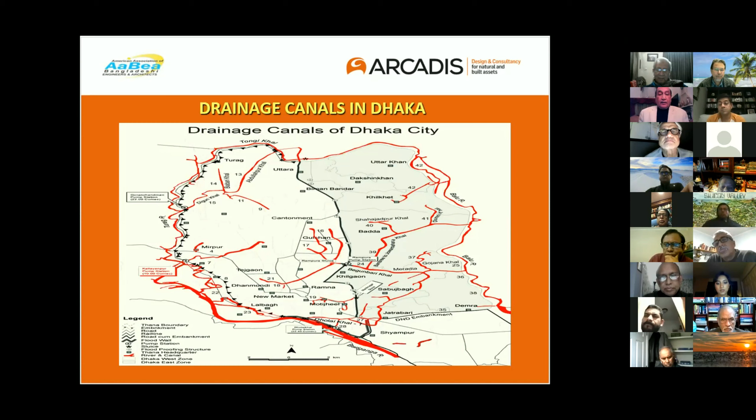But the problem created is that in order to protect Dhaka city against flooding from the surrounding rivers, flood embankments were built, practically enclosing the entire Dhaka city. Now, the surface water, which used to go directly into the river, cannot go because of this embankment. That has created a problem as far as waterlogging is concerned. What we normally call it is a bathtub syndrome — like a bathtub, if you fill it with water, unless you have an exit or drain, that water is going to stay there. That has become the problem for Dhaka also, because of this flood control embankment.

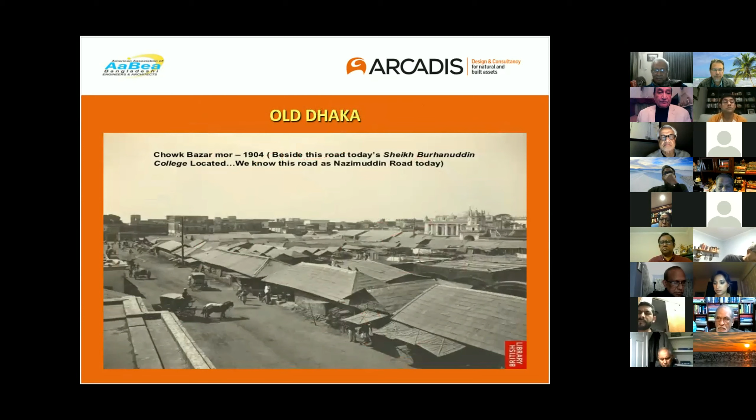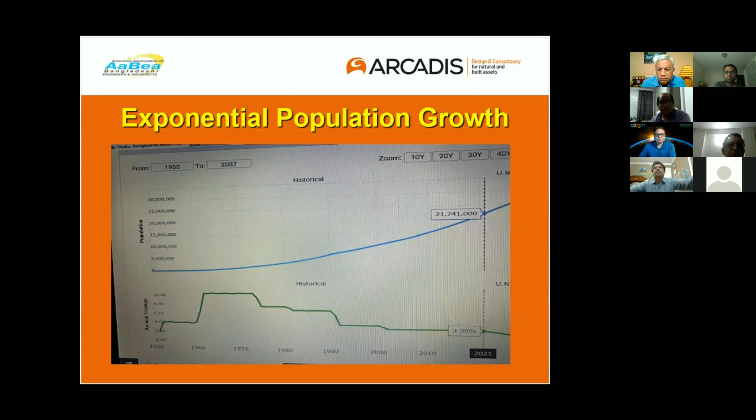But the biggest problem is, of course, since the independence of Bangladesh, there was an exponential population growth. Currently, it is projected to be 21 million, as shown in this graph. And in a small area like Dhaka city, 21 million people is difficult to accommodate. The infrastructure in terms of roads, bridges, and sewer lines, sewer treatment did not keep up with the growth of the population.

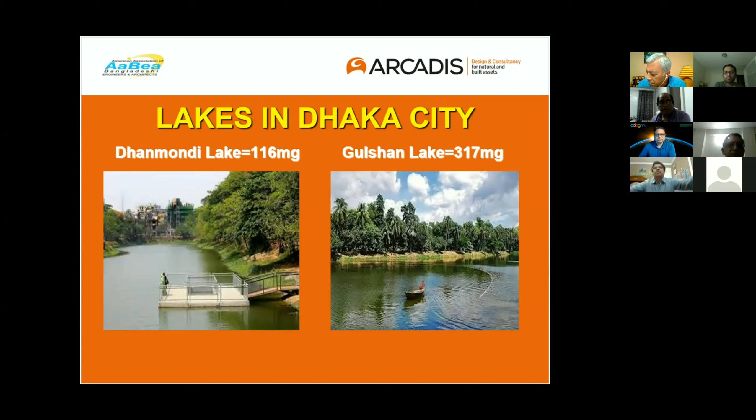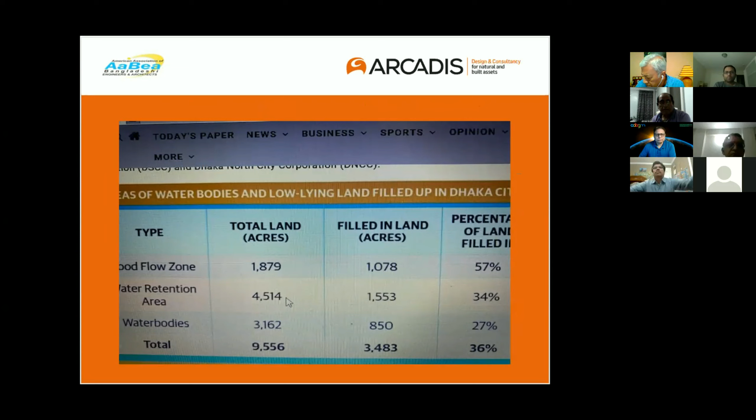As you can see, today's Dhaka is a concrete jungle, very little open areas. The paved surface area has increased substantially, and that reduced the infiltration and increased the surface runoff. We have about 4 large storages for the surface, like Dhanmondi Lake has a capacity of 116 million gallons, Gulshan 317 million gallons, and then Crescent Lake 10 million, Ramna Lake 24 million gallons. But unfortunately, 1/3 of the capacity has been lost due to siltation. So additional water is difficult to transmit into those lakes.

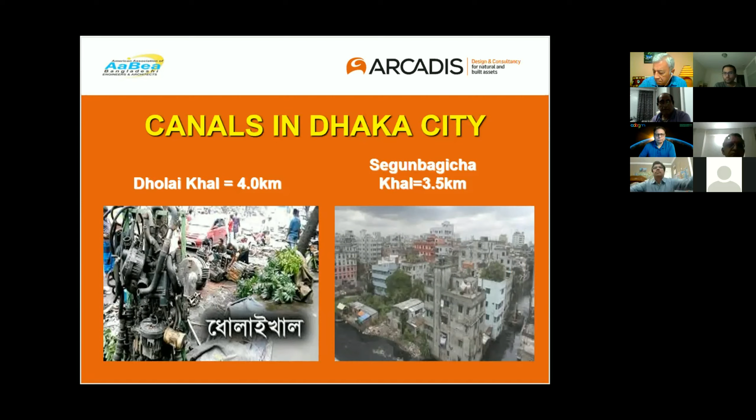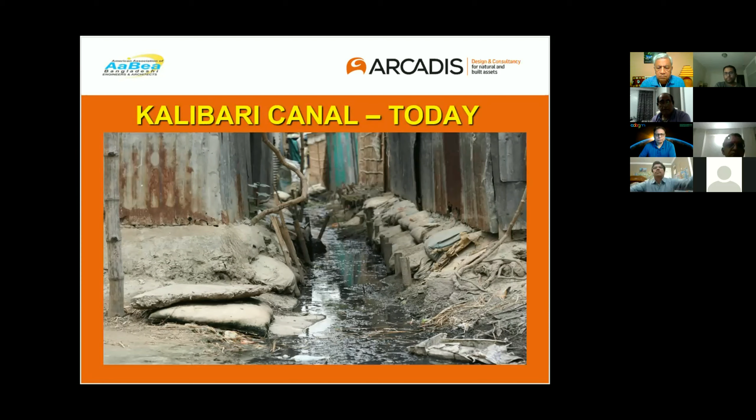This is another canal, Kalibari Canal. In here, it is more like grabbing the canal, and they build up those sheds or things like that to provide accommodation for the ever exploding population. These are all contributing factors towards the waterlogging. The result, as you can see, there are many. I just shared 2 of those, how the waterlogging problem has become serious.

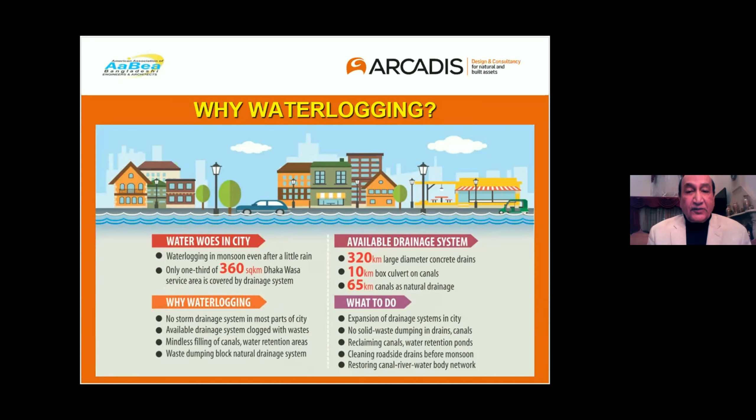WASA has summarized nicely the causes and what should be done and can be done, as presented in this slide. WASA is Water and Sewer Authority. They were responsible for water and sewer as well as this waterlogging. Out of 360 square kilometers of Dhaka city, only 1/3 has any sewer. Total concrete drains is only 320 kilometers. There are 10 kilometers of box culverts and 65 kilometers of canals today. From 300 it has now ended at 26, and most of them are not operational.

So, summarizing, what is the cause of the waterlogging? No storm drain system in most parts of the city. Available drainage system is clogged, mindless filling of canals. And according to WASA, how can we address this problem? The first thing they said is expansion of the drainage system in the city, meaning you have to build up all those storm drains wherever we don't have them, which is 2/3 of the city. Then reclaim the canals, which is important. I think the 2 new mayors have started that. Cleaning, of course, the roadside drains, etc.

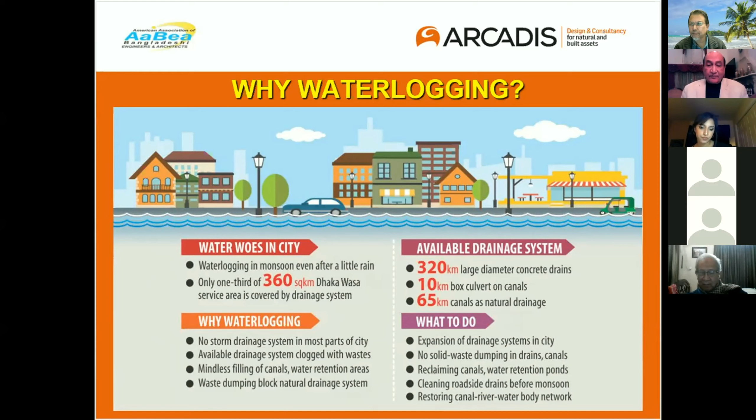Now, I'll just give you an idea of what it involves to install all those storm drains along the roads. It's not only in Dhaka city; we have an area in Queens known as Southeast Queens, and that also gets flooded every time there is a rain. I was leading the master plan for that area. It is a much smaller area, only 15,000 acres, as you can see. So we designed what we call the drainage plans; surprisingly, 60% of the streets don't have any sewer lines. So same problem as in Dhaka. Dhaka doesn't have all those storm drains also. So we developed a master plan for a small area, 15,000 acres.

And when the price tag was added, it was approximately 14 billion, with a B, dollars just to develop this area. And it will take 30, 40 years. They're slowly doing it, following the master plan. This is what we call the gray infrastructure, very expensive and time consuming. To install this type of thing in 2/3 of Dhaka city is going to cost us a fortune.

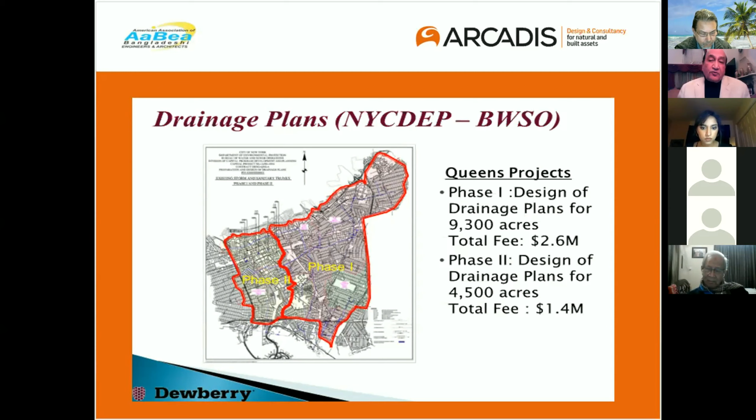So as an alternative, what we are doing in New York City, we have come up with a very innovative solution, which is known as green infrastructure. So what is a green infrastructure? Actually, what green infrastructure does is mimic the natural condition, like back in the 19th century, when water could infiltrate into the ground. So we're trying to facilitate that process. The process is to increase the infiltration and water storage, and that's the way we can do that.

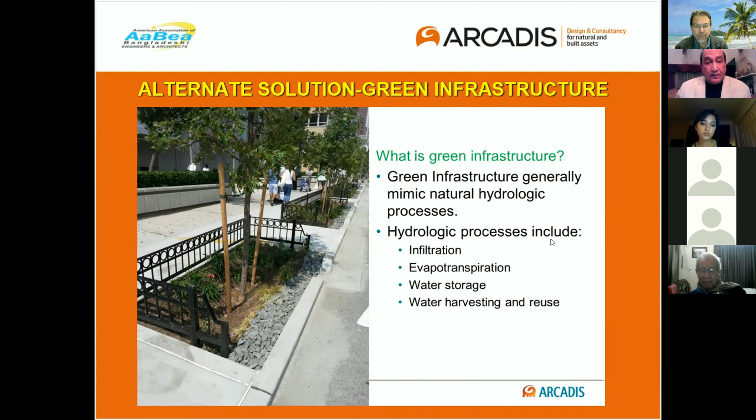Again, the same thing. The bottom layer is going to be, in New York City we have used stones, but in Dhaka most likely we'll be using broken bricks, preferably Jhama brick, which can absorb more water. The top layer is going to be topsoil, then we can plant, again, shrubs, trees, flowers, like that. Water is entering here, it fills up. When it exceeds the capacity, some infiltrates into the ground, and excess water will overflow into the back. It will reduce the peak of the runoff as well as reduce the volume.

Another thing that has been done is the blue roof, meaning we can store water on the roof. That is extensively done in Bermuda. They collect all the water for drinking. And the green roof: some of the buildings in Dhaka city are planting plants and things like that. That will absorb a lot of water. This is one of the ideas also.

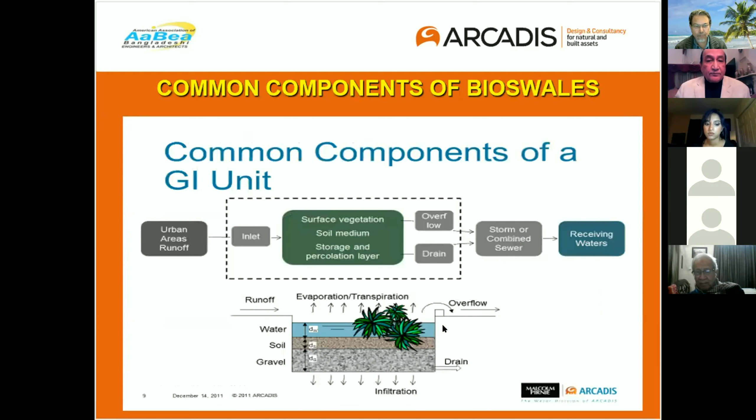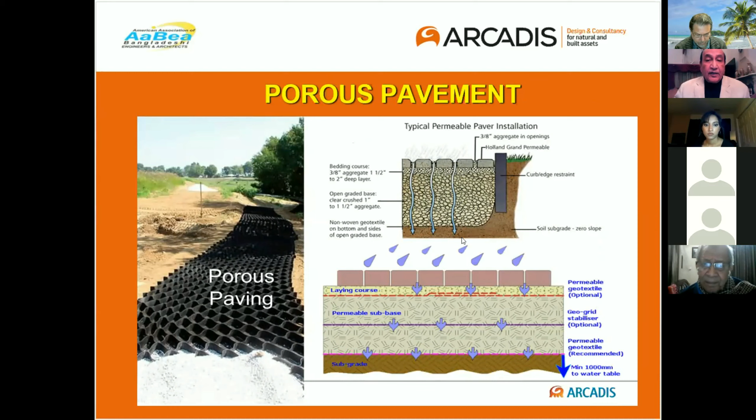Now we can use porous paving, as you can see. Instead of concrete slab, we can have all those planters and this and that, then the water can infiltrate into the ground also. We can also use rain barrels. In New York City, the responsibility is with the New York City Department of Environmental Protection. They were giving out all these kinds of barrels. If the downspout from the roof is connected there, then you can use that water for gardening also.

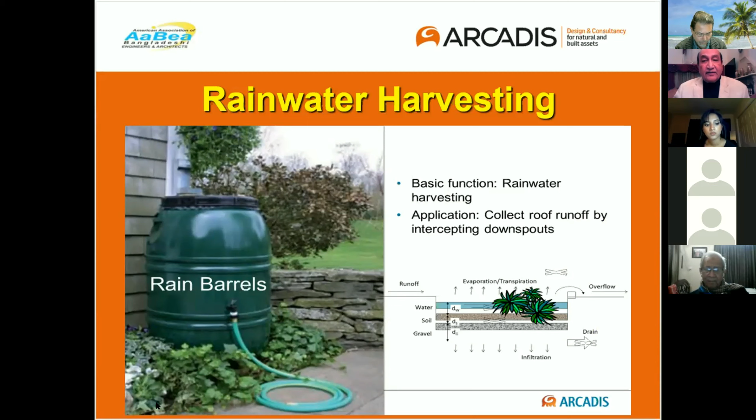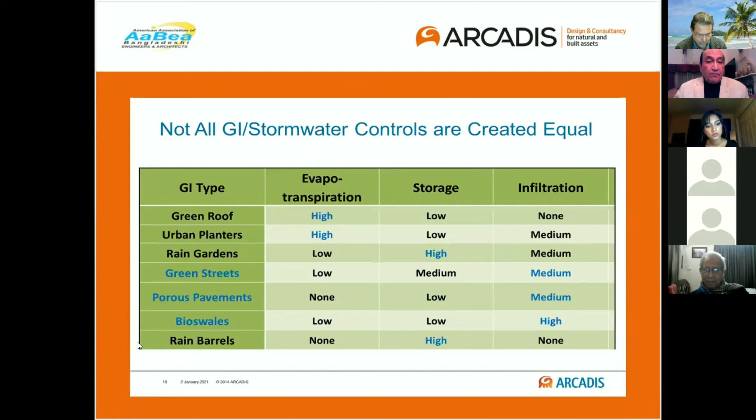But in today's presentation, we are going to concentrate on only one of the green infrastructures, which is the bioswales. And I will share with you what we have done in New York City, a case study of that. The goal was to capture the first 1 inch, or 25 millimeters, of rainfall. Impervious area in New York City is about 30% of the gross area. Dhaka city may be a little less.

Now, this is the idea of the bioswales. All the surface water from the roadways enters the bioswale and is stored or infiltrated into the ground, and the excess comes out from the outlet. That way we can reduce the peak as well as reduce the volume. That was the goal.

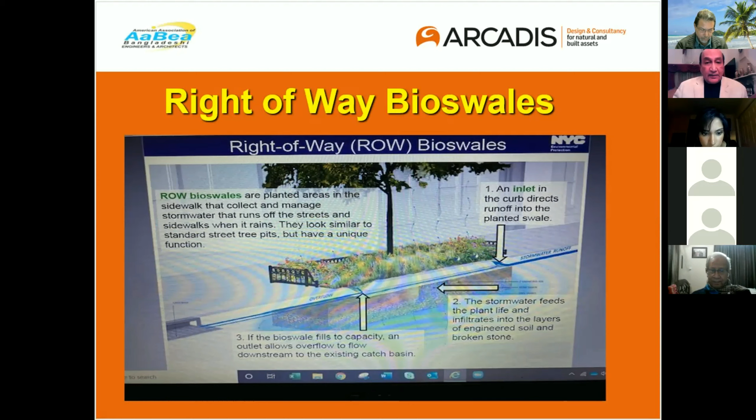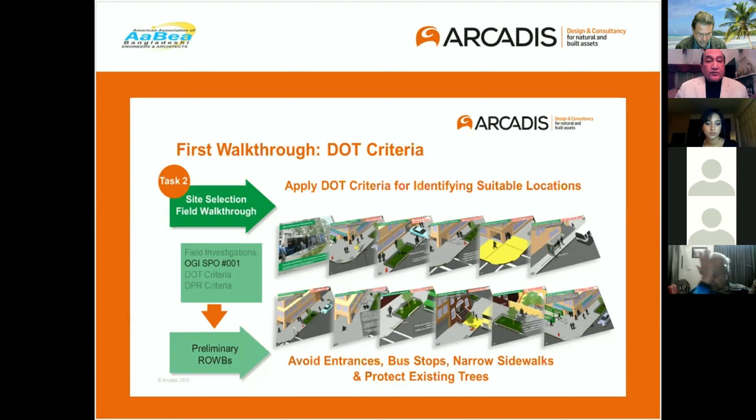Now, in order to install those bioswales, we have to have a site visit and site selection. We have to avoid all the entrances like driveways and things like that. We have to avoid bus stops and narrow sidewalks, and protect the existing large trees. We walk down and try to identify all those things and eliminate them. Only then can we select the location of the bioswales. As you can see, we are marking up where we can put that bioswale.

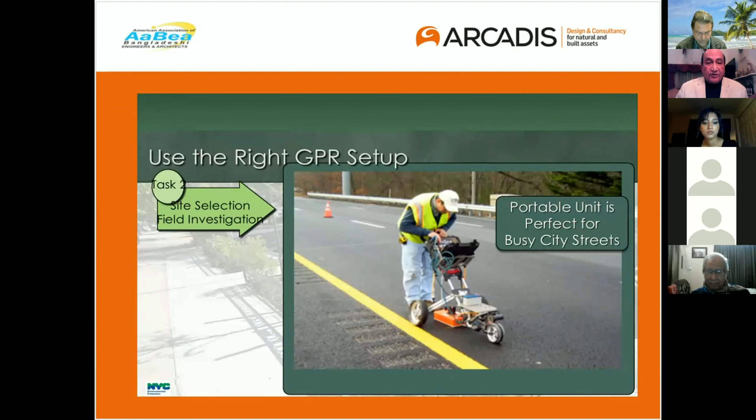So once we have identified a number of these, we want to know what utilities are underneath. So we conduct a ground penetrating radar survey and see what is underneath that slab. We don't want to interfere with very expensive items like fiber optics, things like that. We try to avoid that. This is one of the pictures from the ground penetrating radar survey.

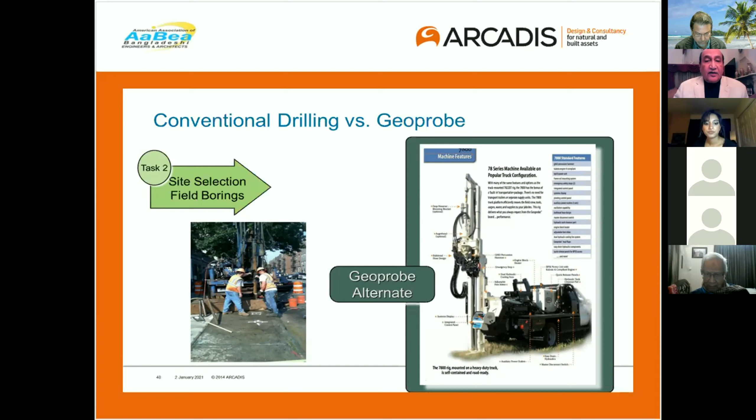Now, the success of a bioswale primarily depends on infiltration, location of the groundwater table, size of the sidewalk, as well as some roadway median. We have been determining the permeability of the underlying soil through boring and the falling head permeability test. In New York it took at least 1 day for one boring. That's very time consuming. A new idea I have proposed for the New York City DEP is called GeoProbe. We can do 4 boreholes with this instrument much faster, and the cost is 1/4 to 1/3.

Also determining the permeability: this hydraulic profiling tool, HPT, can determine the permeability of the soil for the entire depth, as opposed to the falling head test. So this is another innovation in the design.

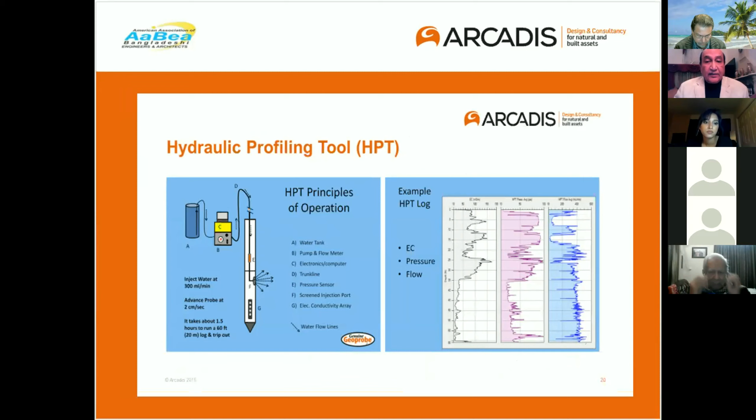Now let's talk a little bit about permeability. In New York City, they were very conservative. They said, we will not put a bioswale if the percolation rate or infiltration rate is less than 0.125 inch per hour, or 8.8 × 10^-5 centimeter per second permeability.

If we compare with the great soil engineers like Karl Terzaghi, who is considered the father of soil mechanics, he gives a much higher range. Ralph Peck, his disciple, also gives a range. Gregory Tschebotarioff, another great practical geotechnical engineer, gives a range. Based on that, I recommended that there should be a range that we can use for the permeability cutoff criteria.

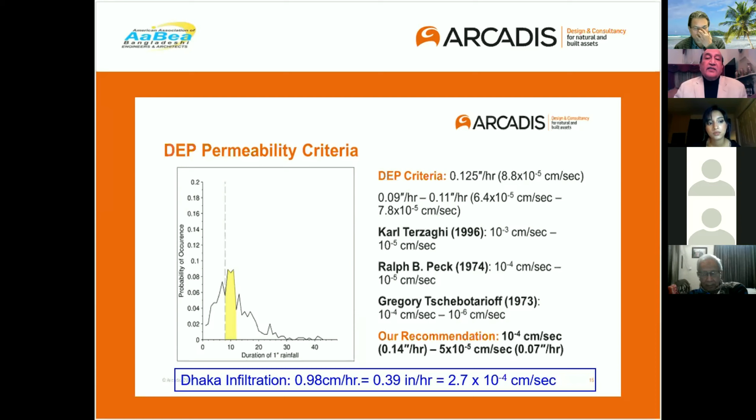I also looked into the infiltration rate of Dhaka city, from a study by BUET for recharging the groundwater. The average infiltration was 0.98 centimeter per hour, or 2.7 × 10^-4 centimeter per second permeability, which is much better than New York City. So that criteria is completely fulfilled.

The other consideration is the groundwater. If it is very high groundwater, of course, those bioswales may not be very effective. But as you know, WASA is supplying the water by groundwater, and the groundwater has depleted in Dhaka city in the magnitude of 40 meters. This is the diagram shown of today's groundwater. So our bioswale will be within 3 meters, so that will not be affected, which is good news.

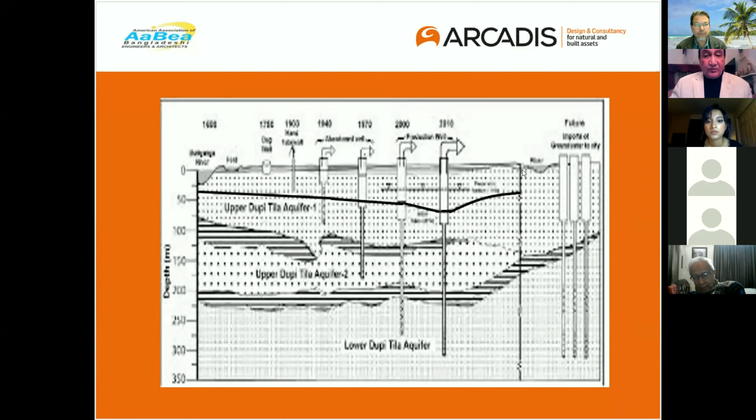Now, the other consideration is that in Dhaka city, we have problems in the sense that we may not have standard sidewalks. In New York City, the minimum width of the sidewalk is 8 feet. We can use 4 feet for the bioswale and 4 feet for the pedestrian. In Dhaka city, the widths of the sidewalks are not regular, and many streets don't even have any sidewalk.

So what are we going to do in Dhaka city where there are no sidewalks? There is another design I was involved in, for the St. George Terminal in Staten Island. They had a similar problem. We came up with an innovative solution, which is called an infiltration basin using rain tanks.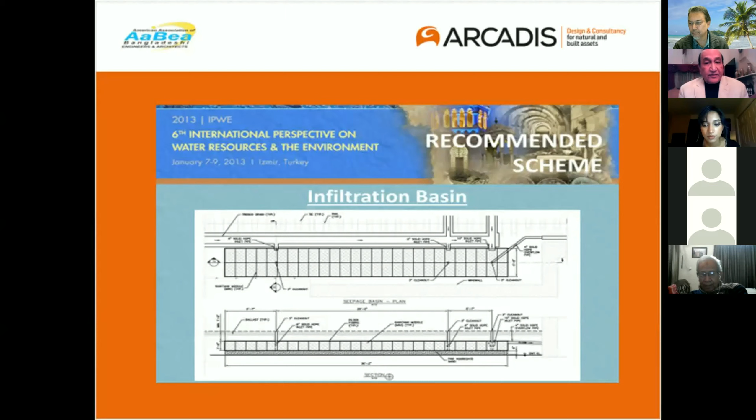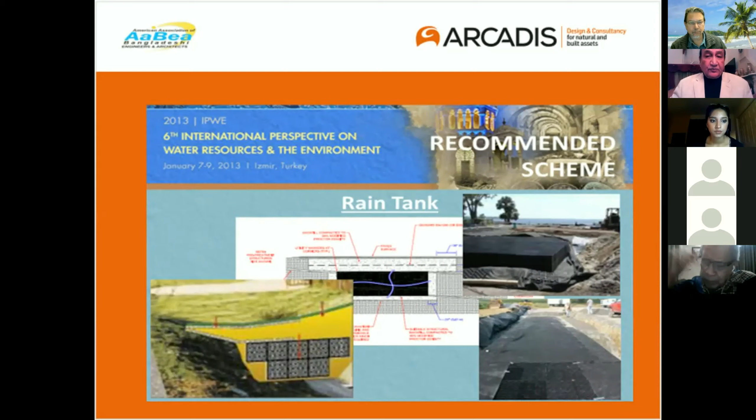So rain tanks are really a modular type of thing, very high porosity, 95% porosity, which is good. They can be installed in a basin, and we can divert the water into there, and that will infiltrate into the ground. This innovative project, as I said, was done for Staten Island, and I presented this paper at the 6th International Perspective on Water Resources and the Environment, held in January 2013 in Izmir, Turkey. So this is another solution we can look into for Dhaka as well.

Now, in order to bring the water, we might have to use a French drain. It's a very fancy name, but it's very simple. We dig a deep channel, we put in perforated pipes, and fill it up with gravel. This will collect all the water, which will then be transmitted to the infiltration basin.

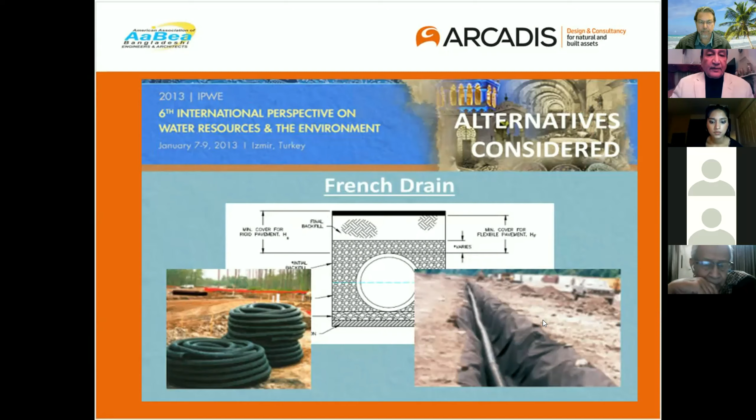Now, the other thing we can do in Dhaka city, particularly in the new roadway areas, they have pretty decent medians. And those medians can be used as a large infiltration basin to collect the surface runoff. As you can see here, this is the median, and we can put the infiltration basin for the entire length or width. That could be a very large storage for the surface water. It has two benefits: it will reduce the surface runoff, plus provide the moisture needed for these plants. We just started to do this kind of thing in phase 2 for New York City.

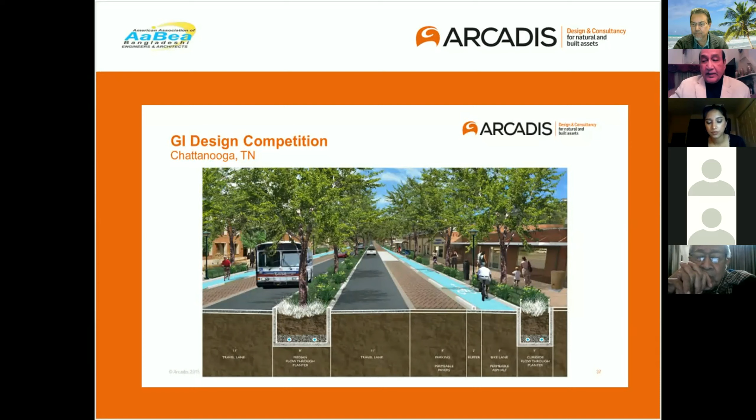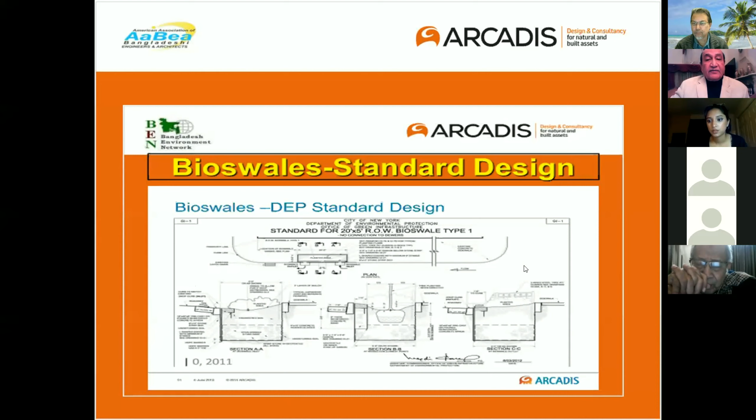This is the standard design we have developed. We have developed standard designs for 3 types: 10 feet length, 15 feet length, and 20 feet length. This is type 1, 20 feet length. As you can see, the water enters here. Then in the middle, we can put topsoil and the planting. Then at the outlet, the excess water can get out back. These standard designs and drawings are all available.

This is the simple construction. You dig a hole, then the bottom 2.5 feet will be filled up with gravel, in our case probably broken bricks. And sometimes the permeability could be very low. Then we put in sand drains, just a perforated pipe we fill up with sand or broken stone, to facilitate the infiltration.

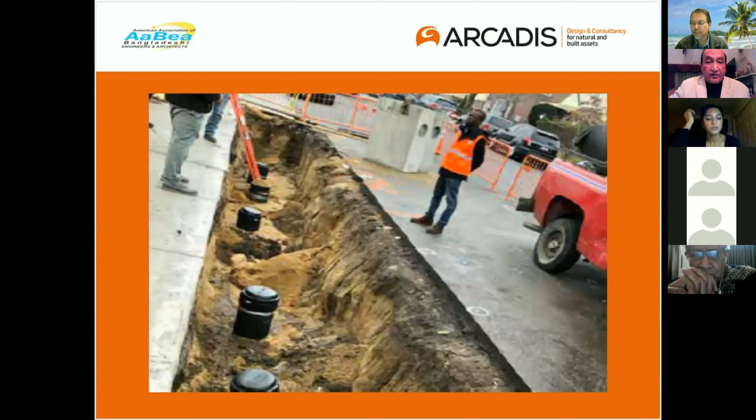Now let me try, if it works, to give you the idea of how it works. Very simple concept. The water from the street is entering through the curb cut into the bioswales, and it is being stored and infiltrates into the ground. And when it exceeds the capacity of the individual biocell, it is returned back to the street again. Very simple concept. We have done model studies and everything, and it works very well.

Now let me give some conceptual ideas. I looked into a major rainstorm in Dhaka city back in 1996. It was raining continuously for 3 days. On the first day, September 16, the intensity of rainfall was 37 millimeters per hour. The second day, the 17th, it was 28 millimeters per hour. And on the third day, September 19th, it was 41.5 millimeters per hour.

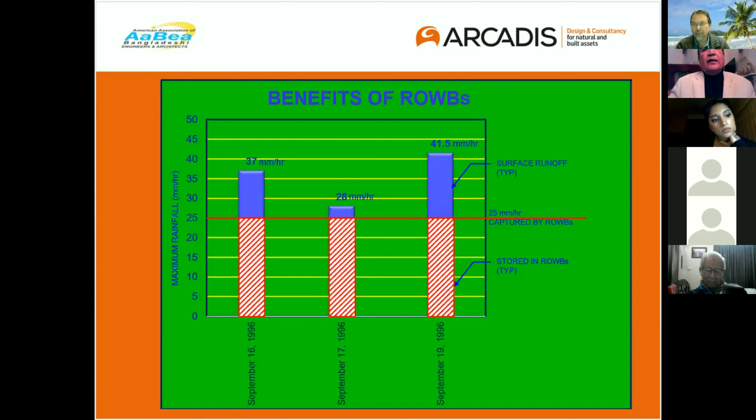If we can install those bioswales, then the peak will be reduced substantially, will be spread out, and the volume also will be reduced substantially. So the waterlogging will be mitigated quite well.

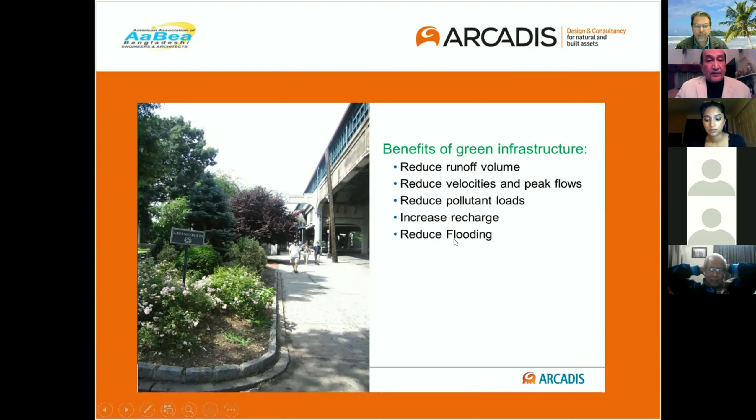Now, just to summarize, what are the benefits of these bioswales? Number one, reduce the runoff volume. Number two, it will reduce the velocity and the peak flows. Increase the recharge into the groundwater, which we badly need in Dhaka city. And of course, reduce the flooding or waterlogging. These are the benefits of these bioswales.

Now, this is not the first time we are doing this, and Bangladesh is not going to be a guinea pig. It has been introduced quite some time. And we have been working on this innovative design for almost 8 years. The first paper I presented in 2014 in Quito, Ecuador. And that was primarily what we did in New York City.

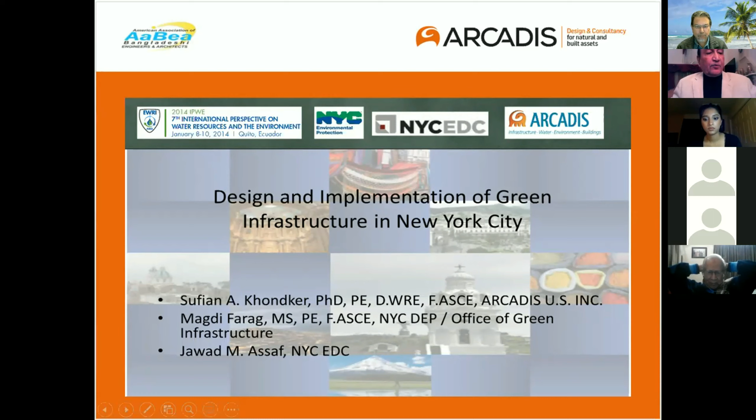And my co-author was Farag. Those who work in New York City DEP, they know him. He is kind of a godfather for the infrastructure. And we worked together to develop all those criteria and everything. The next one was presented at New Orleans. They were also looking into this.

Then specifically for Dhaka city, Alleviate the Waterlogging for Dhaka City, I presented this paper at the 10th International Perspective of Water Resources and the Environment in 2018 in Cartagena, Colombia.

The next one was in Dhaka itself in February of 2019. This was the first conference for the expatriate engineers. That was a great presentation on February 26th and 27th. And as I understand, our Dhaka North City Corporation Mayor, Honorable Atikul Islam, was supposed to chair this conference, but because of the mayoral election, he couldn't make it.

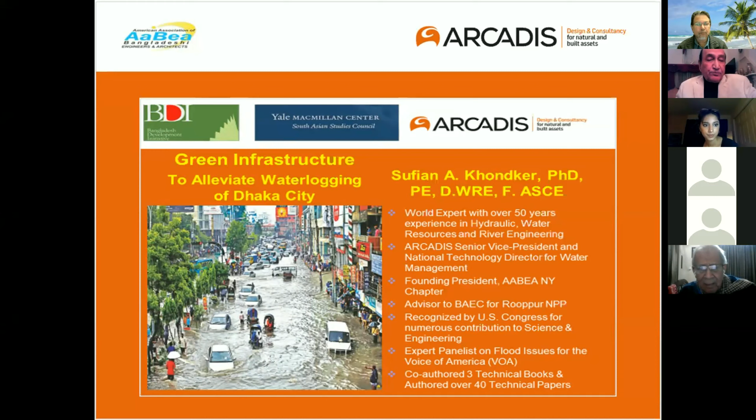The last one I presented for BDI, which is Bangladesh Development Initiative. They had this conference at Yale University back in March 2019. So this is not new. It is pretty much a proven concept.

Now, we got pretty good coverage, like Prothom Alo had a front page featured article. Then Bangladesh Pratidin had a back page article on the Yale presentation. But again, I don't think it was presented to the key people, the decision makers. Nobody reads the newspapers and calls and wants to know about it. So that's one of the areas we have to concentrate on.

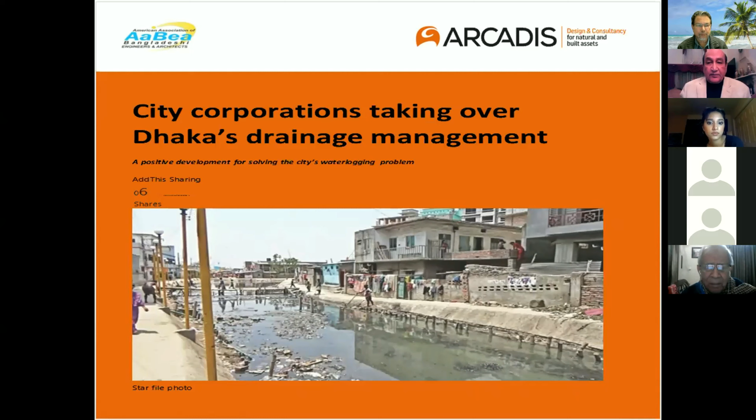As you know, since last month, the responsibility of Dhaka's drainage management was transferred to the city corporations. It is no longer with WASA and the Water Development Board. They took the full responsibility. And Dhaka Water Supply and Sewerage Authority has handed over responsibility of the Dhaka drainage system, consisting of 26 canals, 10 kilometers of box culverts, and 385 kilometers of storm drains.

Dhaka South City Corporation Mayor Barrister Sheikh Fazle Noor Taposh and Dhaka North City Corporation Mayor Atikul Islam expressed their commitments to deal with the canals first. Just to quote Barrister Taposh, we have already taken a crash program to clean canals and box culverts, which is necessary, of course.

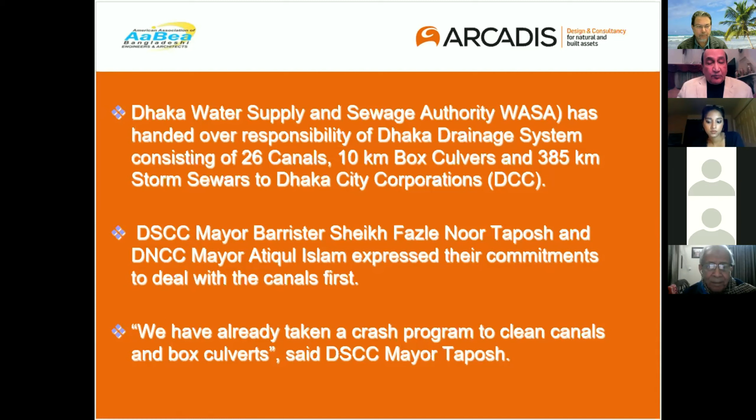Now, once we clean up all the canals and everything, then the water will be collected into those canals. And before, it used to transmit directly into the surrounding rivers. Now we have a problem. We built those embankments enclosing Dhaka city. Now these canals cannot directly discharge into the surrounding rivers. And that has created the problem I already explained earlier.

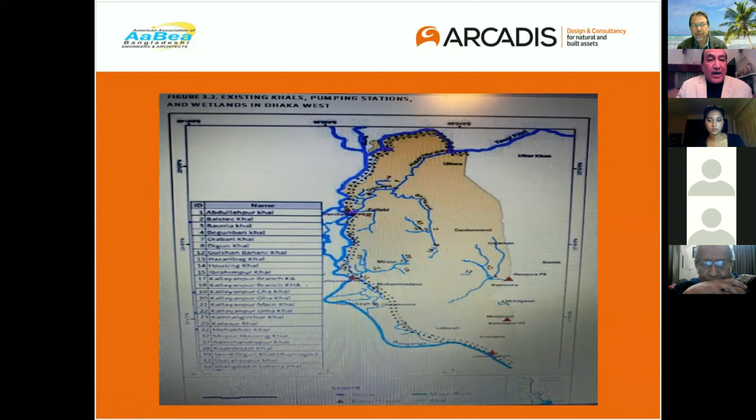Right now, what they're doing is that there are 4 large pumping stations pumping the water on top of the embankment. These are the 4 large pumping stations: Narinda 150,000 GPM, Kallyanpur 158,000, Confluence of Buriganga and Dholaikhal 349,000, and Goran Chatbari 349,000 GPM.

This sounds like a very large number, but this is absolutely inadequate considering the total surface runoff. And this solution is extremely expensive also. This is the idea. If the river water is low, then of course you can discharge the water from the canal directly into the river. But when the river level is high, of course, you have to close the sluice gate and you have to pump the water into the river. And that has been proven to be grossly inadequate.

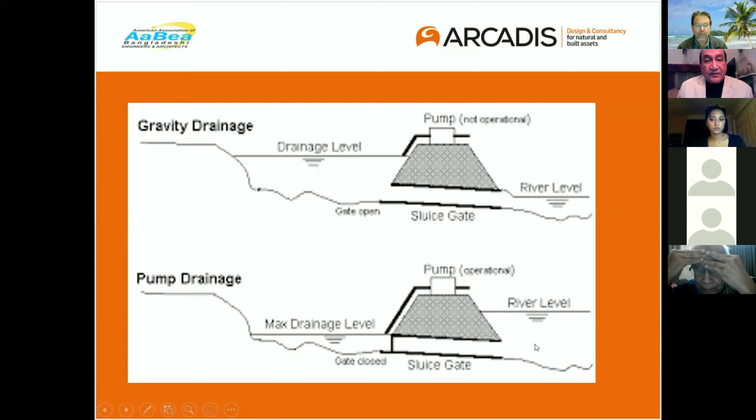Now, we looked into this problem. I was involved in two such designs. We all know historically the operation of the sluice gate, the track record is not that great in Bangladesh. So this is one of the concepts where the gate is operated by water. This is hydraulically operated, no manual operation, no push button closing and opening. This simply works with the water.

When the water level in the river is low, then the canal water will push up the gate and the water will be released into the river. When the water is high, the water will automatically close it. No other operation, and it works perfectly. I have used this concept in Hingham Bay in Massachusetts and Huntington Bay in New York. This could be a good solution to look into.

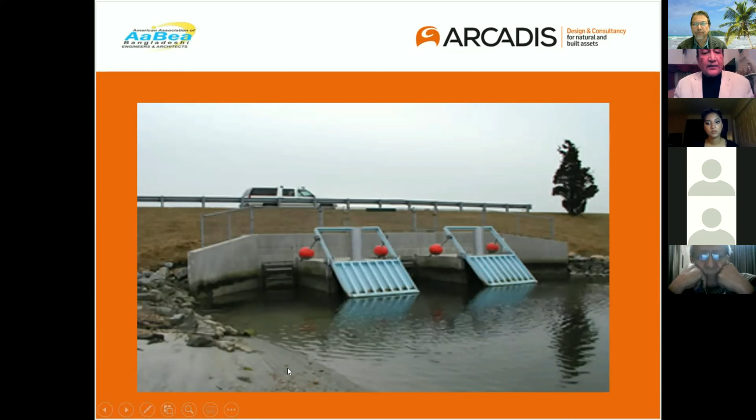Again, getting back to the current situation, Barrister Taposh promises that there will be a master plan to solve the waterlogging, which is the right way to proceed. Then, of course, we have a mayor from the Dhaka North City Corporation. Everybody is worried about the encroachment of those canals. And let me quote him, "No encroachers will be spared." That is going to be tough, but that is what is needed to reclaim those canals.

So what can I do? As an expert here and a Bangladeshi, I would like to help as much as I can. So this is my commitment to the authorities. Currently, it is going to be the Dhaka City Corporations; I'd be glad to serve as an advisor to the Dhaka City Corporations. As you probably know, I served as the advisor to the Joint Rivers Commission for 5 years until the Ganges Water Treaty was signed. Currently, I'm serving as the advisor for the Atomic Energy Commission, Bangladesh, providing advice.

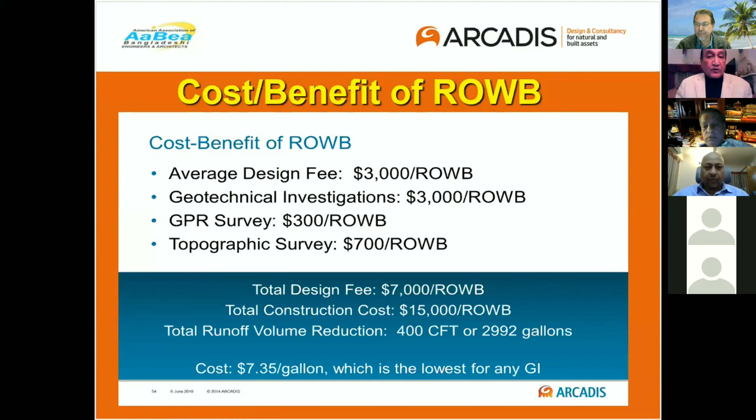Now, from the website, I just saw that the Dhaka South City Corporation has a budget for 2021 of 765 million, and Dhaka North City Corporation has a yearly budget for 2020 to 2021 of 563 million. In New York City, we build about 10,000; 9,000 have been completed. And if we build about 10,000 bioswales in Dhaka City, then the cost is 6% of the annual budget, which is not much. And of course, for the water mitigation, they're going to get additional budget as well. So cost should not be a problem to solve this problem.

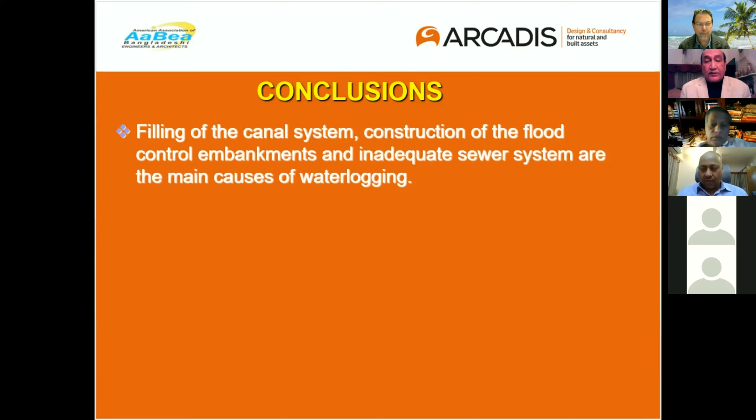Now let me try to conclude. The first thing we said: the filling of the canal system, construction of the flood control embankment, and inadequate sewer system are the main causes of waterlogging. So we have to address them one at a time.

Reclamation of the canals and construction of a proper drainage system will require a lot of money, but canal cleaning up is much more effective than building up those sewer systems. I already told you, in a small area of 15,000 acres in New York City, it was costing about $40 billion.

As an interim solution, we can build about 10,000 bioswales at a cost of roughly $100 million. This can be constructed fastest if we go 3 years, or leisurely if we go 5 years, costing between $25 million to $35 million per year, which should not be a big problem.

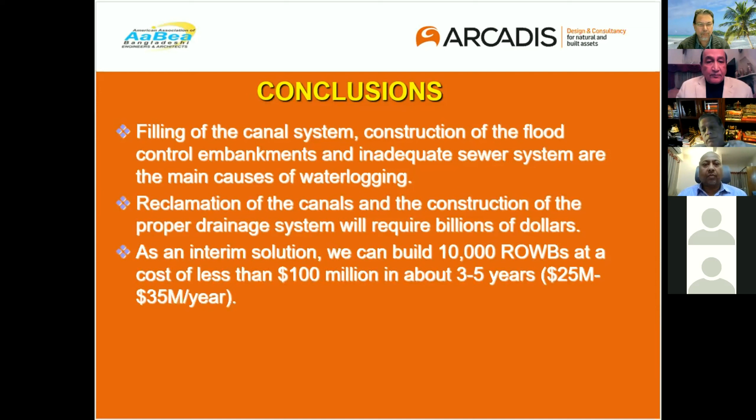10,000 bioswales will manage about 50 million gallons of water, either through storage or through infiltration. That is a tremendous volume of surface runoff, and that we can do. In New York City, we are managing 54 million gallons of water with 10,000 bioswales.

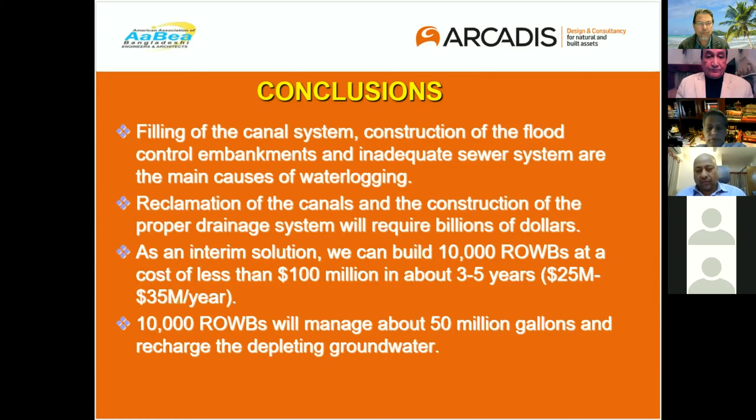So the bioswales should be a part of the master plan to alleviate the waterlogging in Dhaka City. Mayor Barrister Taposh already said we are putting together a master plan, and this concept should be the centerpiece of the master plan. That is what I think and my recommendation.

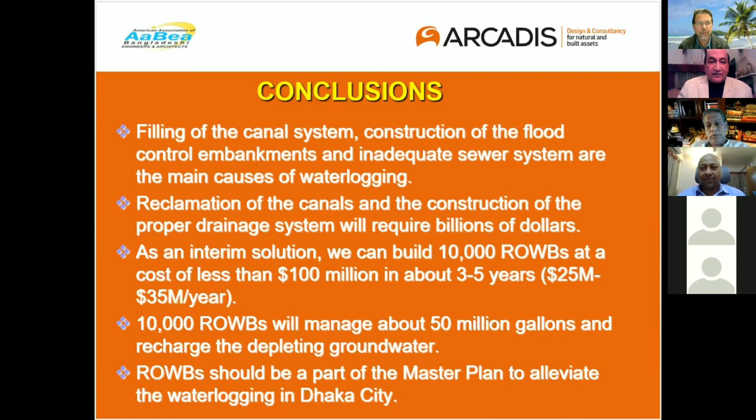With that, ladies and gentlemen, I am privileged to present this paper to you. I hope you enjoyed it. And of course, next, I think we'll open it up to questions and answers.

Thank you for the presentation. I have a question, if I can ask. For the bioswale, how will you prevent pollution, like pollutant materials carried by the surface water from impacting the plant quality and the quality of the groundwater, especially in busy cities where there's a lot of pollutants entering the surface water? So what would the impact be?

Well, if I may interrupt a little bit, please hold on your thoughts, sorry, Sufyan Bhai. We want to get an update from Azad. Oh, that's right, and then we'll go to the Q&A.

So all of you probably know Azad already. Azadul Haq is associated with many activities about Bangladesh, for example, the Bangladesh Rising program at Harvard, and he did the CONE conference in Dhaka. But I will let Azad say in his own words, including messages from Mayor Atik. Azad, floor is yours.